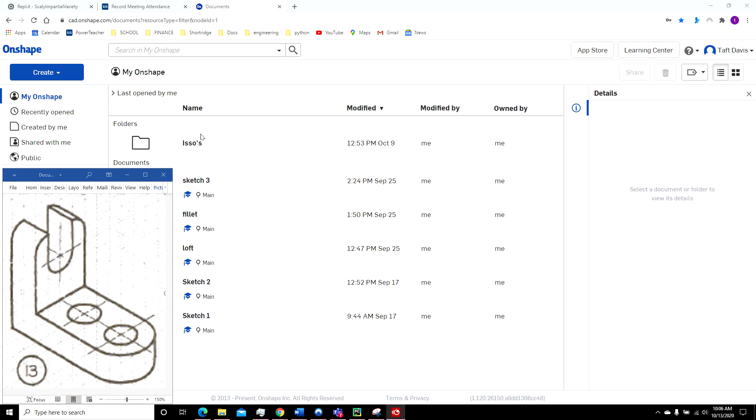All right, let's take a look at ISO shape number 13. On this one, I think I'm going to do the front view. I'm going to do kind of this L shape. And then I'll fillet the ends to round that off, and then I'll cut out these parts that need to be cut out.

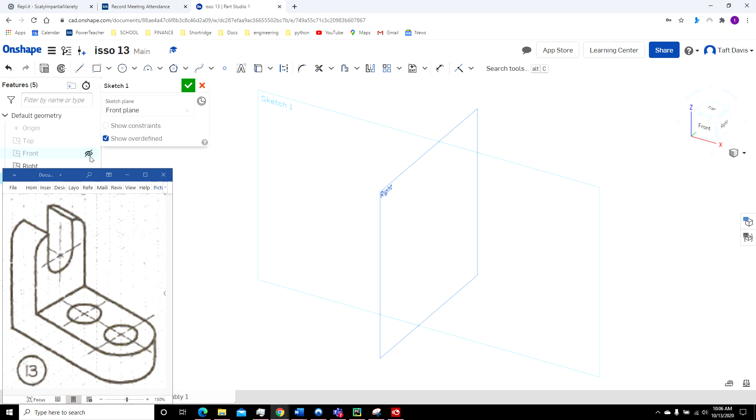All right, so I want to put this in my ISOs folder. I'm going to create a document. I'll call it ISO 13. Click OK. Now, since I'm doing the front part, I'll click on this front plane. I'll click Sketch. And then I'm going to turn these others off and click on the front.

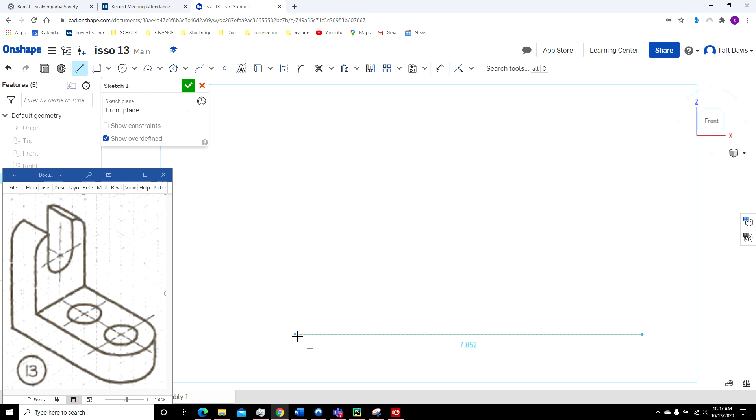Okay, coming across the base right here, it's 1, 2, 3, 4, 5, 6, 7. Then it goes 8, 9. So I'm going to click on the line right here. I want to make sure it's horizontal. You can see it's kind of that green and blue line. If I get off, then it turns solid blue. I click again. I'm going to type in 9. Enter.

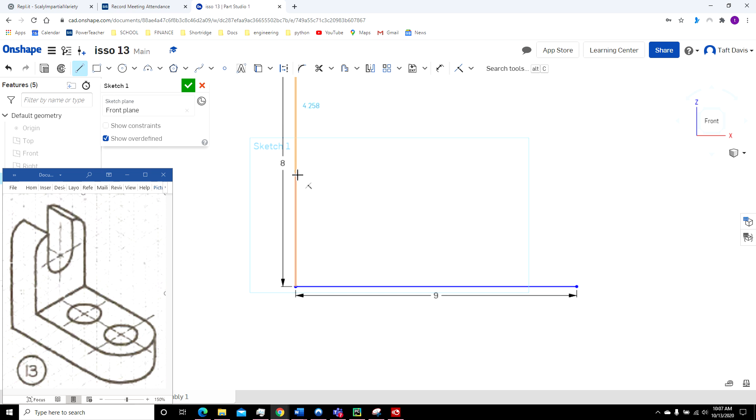Now when I look at going up, it goes up 2, and I want to go all the way up to here. So we've got 1, 2, 3, 4, 5, 6, 7, looks like 8. Click there and type in 8. Come out a little bit. Then I go 2 across. I'm going to come down 6. Now I'm going to come 7 across here. And then come straight down and connect.

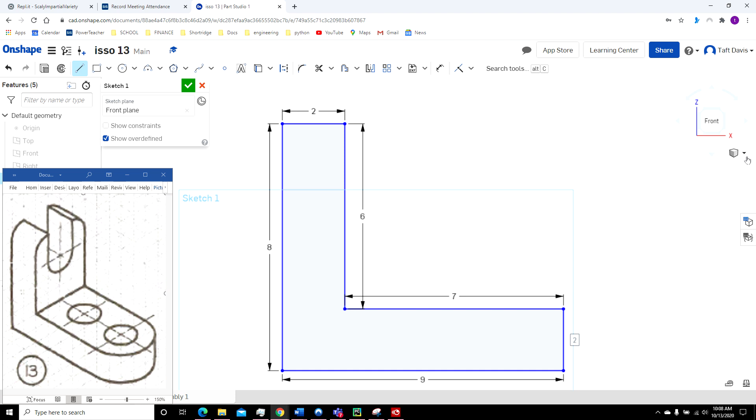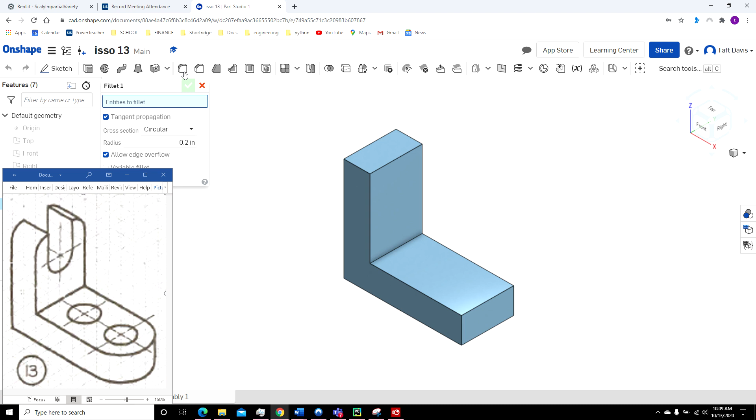I'm going to come over here, click on the isometric view. I want to extrude it, and it's 1, 2, 3, 4 inches wide. Type in 4, enter. Okay, so that gives me this basic shape here in the front. Now I want to round off my corners. Since this has a 4-inch diameter, I know that my fillets need a 2-inch radius. So I'm going to click on the fillet. I'm going to change that radius to 2. And click on each of these corners. So now I've kind of got it rounded off.

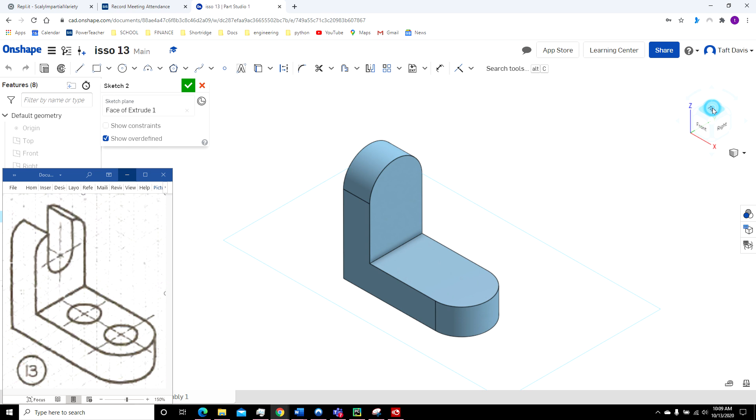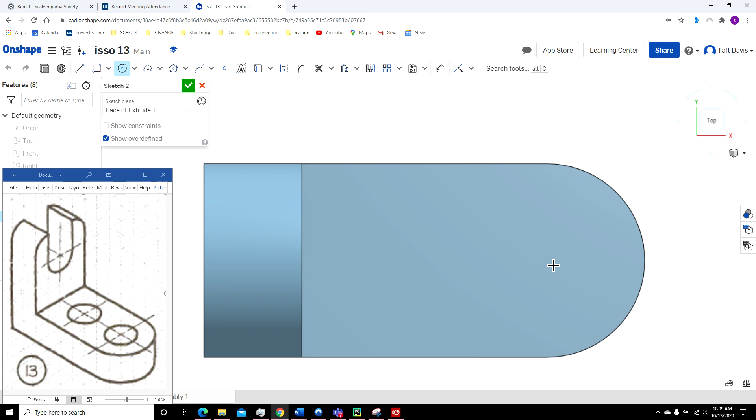Now it doesn't matter if I cut this section out first or cut my 2 holes out down here first. So I'll do the 2 holes first. So I'm going to click on this surface. Click Sketch. I'm going to click on Top. Now these circles have a 2-inch diameter. All right, the nice thing is this first one, when I find that square right there, I know that I'm at the center of the circle, or that half circle at the end. So I left click, drag out. And because it's got the circle with the line through it, that means that it wants the diameter, which is 2 inches.

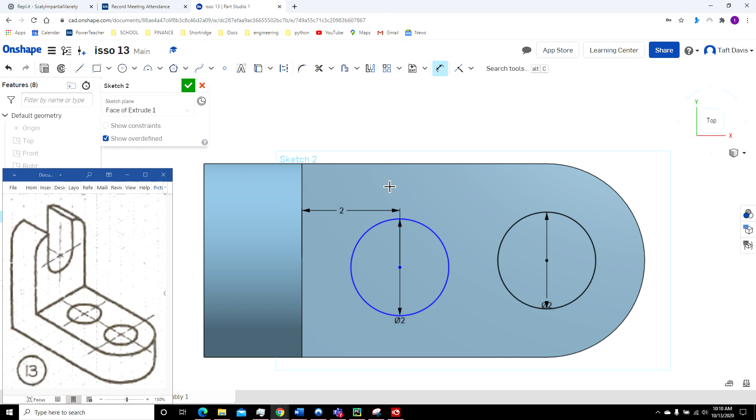Now I need to do another circle. And here I'm not going to get anything to help me with that, so I'm just going to do a circle with the 2-inch diameter. So now I'm going to dimension it. So the center of the circle is 2 inches from this end. So I'm going to click on the center, click on this line, make that 2. Then it's also 2 inches from each side. So it doesn't matter if I go from the top or from the bottom. So I'm going to click on the center here, click there, make that 2 inches.

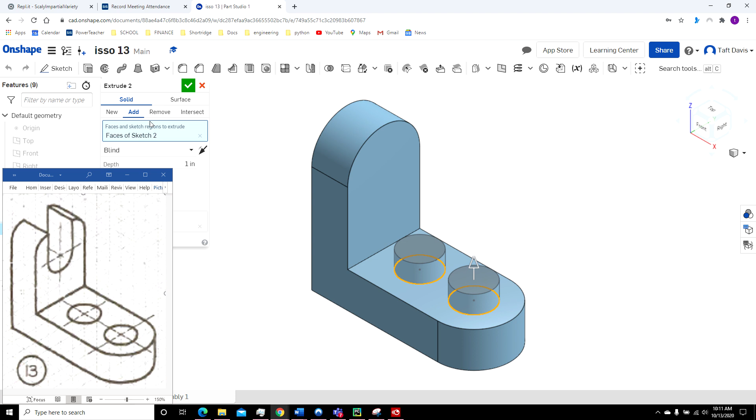I'm going to click on the isometric view again. I want to extrude, but this time I want it to remove. And to cut all the way through, I need to make it at least 2 inches. Okay. So cut all the way through. Now I'm going to cut out this section. What I'm going to do is I'm going to make a rectangle, cut out the rectangle, and then use the fillet to round it off.

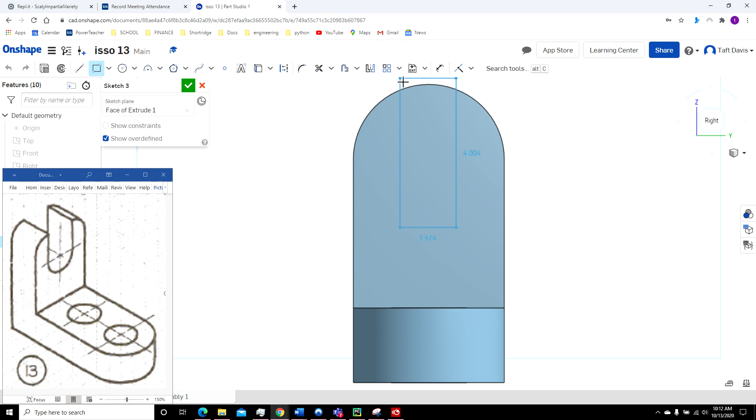So I'm going to click on this face. I'm going to click Sketch. This is on the right side. And I want to make sure that my rectangle goes completely off the top because we cut out the top. Now right here, it's 2 inches wide. So I'm just going to type in 2 and enter. The height doesn't matter as long as I go above the top. So I can just click enter there. Now I need to center this. It's 1 inch from the edge. I'm going to use my dimension. Click on my rectangle, click on the edge, make that 1 inch.

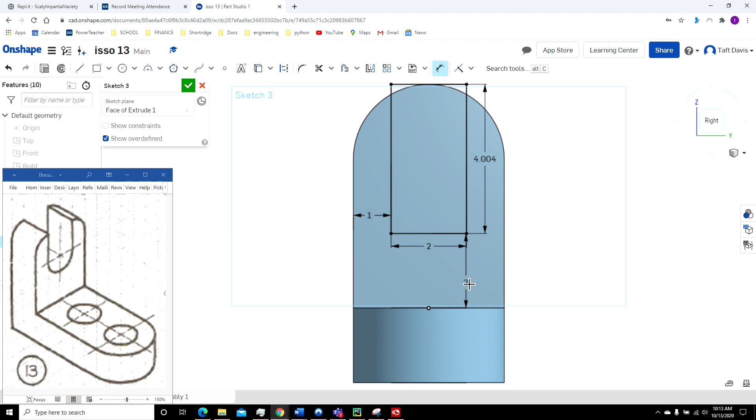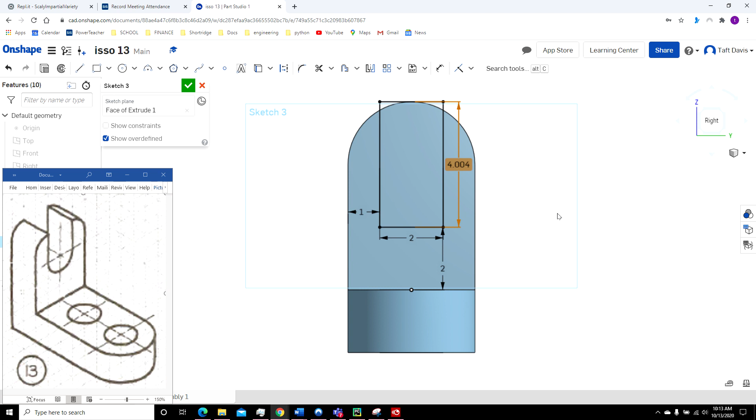And then this bottom is 2 inches from the top of this bottom section. So I'm going to click here. There, make that 2 inches. I want to make this a little bit taller because I'm just barely getting on the edge now that I've moved this down. So I'm going to make that. Let's see if we can dimension this. Yeah, because I've already dimensioned that, it's not going to let me dimension it again. So let's just see what happens.

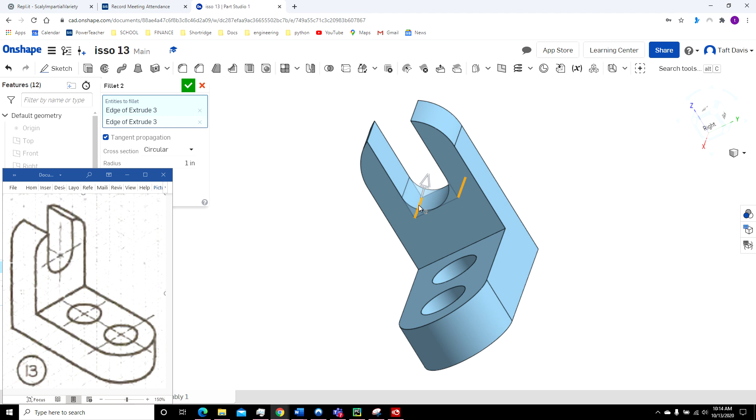Okay, so I'm going to go isometric. I want to extrude. I want to remove at least 2 inches. Okay, yeah, good. It cut that out. So now I'm going to do the fillet. Now my circle right here is 2 inches wide, so that means my radius is going to be 1 inch. So I click on this corner. Now let's move around this way. And then click on this corner. Click done. And that's shape 13.